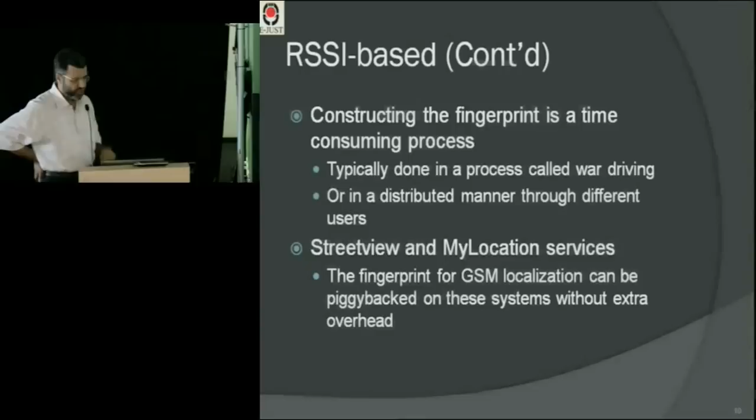So in order, for example, to get the pictures of the streets in the Google Map application, while you are doing this, you can piggyback your radio map construction in the same process. So it is not something that you have to do particularly for localization. You can do it for other applications too. So the war driving overhead is very minimal here too.

So currently, to my knowledge, there are 2 main techniques for using RSSI localization in GSM networks. One is deterministic fingerprinting, and by this what I mean is that the red dots represent locations where you have the fingerprint. So at each of these locations, you stand and collect the signal strength characteristics. And here I assume you have only one cell tower, and the characteristic that is stored in the radio map in deterministic techniques is the average signal strength from this cell tower.

So you stand at this location, you collect a number of samples, and you store in your radio map the average signal strength you hear from this cell tower. The yellow dot represents an unknown location. You are currently standing at this yellow dot, and you want to know which of the red dots you are standing at currently.

So in order to do that, what deterministic fingerprinting techniques do is they calculate the Euclidean distance between the signal strength at the unknown location and the signal strength stored in the radio map. And they return the closest location in the radio map in terms of signal strength as the estimated location. So in this example, the closest location is -32 to -28, and it's returned as your estimated location.

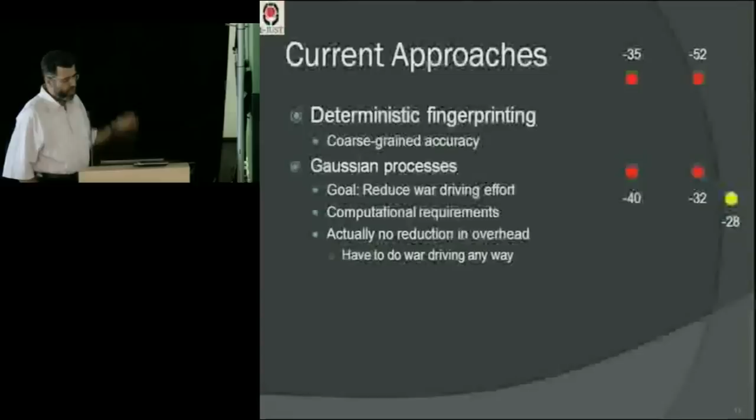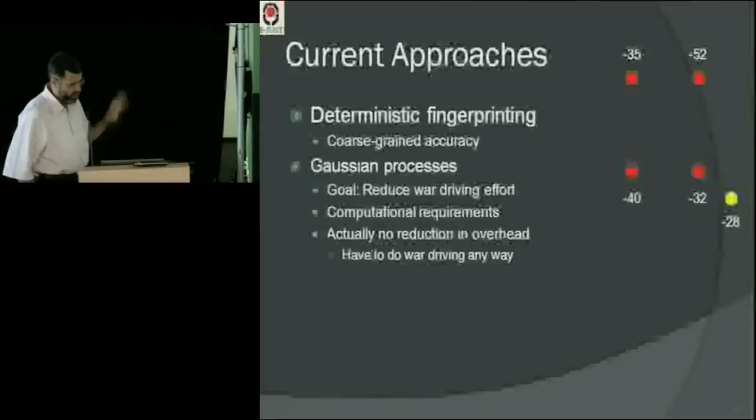We believe that deterministic fingerprinting techniques provide coarse-grained accuracy, and that's why we propose probabilistic techniques that can help enhance the accuracy of localization, as I will talk in the next part of my talk. There have been also proposals using probabilistic techniques before.

What is called Gaussian processes, and the idea here, their goal was to reduce the fingerprint construction overhead. So instead of collecting 1,000 samples, for example, you collect only 100, and then you try to interpolate these 100 samples to obtain more samples. So you are reducing the number of points you need to collect, and in order to do that, they assume a Gaussian process model and a propagation model to obtain the remaining of the samples.

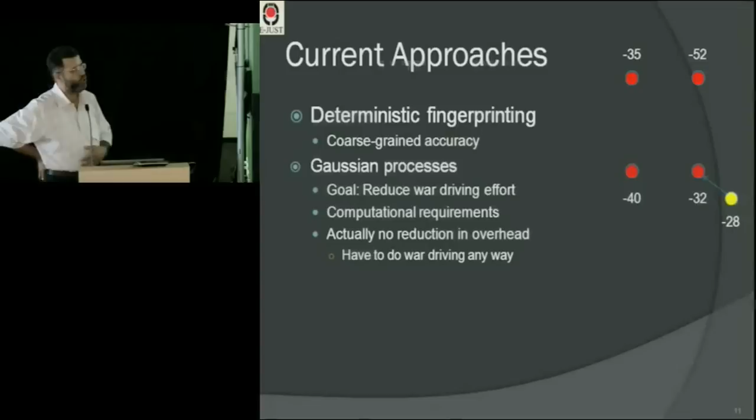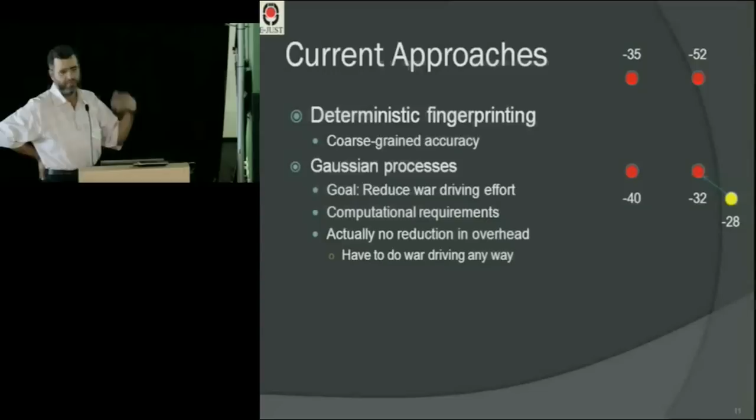You can imagine in order to do these interpolations, your computational overhead will be very high, and actually, I believe that there is no actual reduction in terms of the overhead. Why? Because in order to collect 100 samples, you will need to do the war driving anyway. So if you do the war driving, it doesn't matter if you collect 100 samples or 1,000 samples because you already drove the streets. So it doesn't save much in terms of fingerprint size.

So our approach is to use probabilistic fingerprinting, and hopefully we can obtain more accurate localization. And instead of storing in the radio maps, the red dots, the average signal strength, we need to store the entire signal strength histogram. So this gives you more information about the signal strength behavior, and using this extra information, you can obtain more accurate localization.

However, the challenge here, in order to obtain a signal strength histogram, you need to stand at each location for a certain amount of time so that you can collect enough samples to construct your histogram. So by this, you are complicating the radio map construction process, because instead of driving continuously by your car, you will have to stop at each location. So this will increase your time significantly. So what we propose in CellSense is how can we reduce this overhead in terms of constructing the radio map.

So I'll talk about the two phases, which is the offline phase, constructing the radio map, and then the tracking phase, estimating the location once you have your radio map in place. So in order to solve the overhead of the construction of the radio map, we use a gridding approach. So your area of interest is divided into a grid where each cell represents a virtual location.

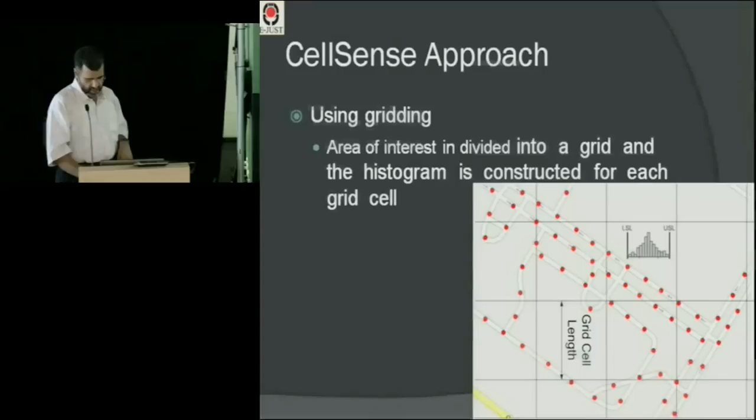Of course, we have a parameter here, which is the grid cell length, how large your grid size should be, and by this parameter, we can control the accuracy of the system and trade it off with the scalability of the system. Because the larger your cell size, the less your number of grid cells, and hence the better your scalability, but your accuracy will decrease. And we'll quantify this later in the evaluation section. So this is the offline phase. What we do is we divide the area into grid cells and construct a histogram for each cell.

During the tracking phase, you are standing at unknown location L, and you are receiving a signal strength vector of Q dimension, where Q is the number of cell towers you can hear. In the GSM standards, you can hear up to 7 cell towers. So each component represents the signal strength from one sample from a cell tower. And what we want to find is the location L in the radio maps that maximizes the probability of this L given the received signal strength vector S.

Using Bayesian inversion, the location that maximizes the probability of L given S is the same location that maximizes the probability of S given L. And I remind you, the probability of S given L is what we stored in the radio map. So this information on the right-hand side can be obtained from the constructed radio map. Assuming the cell towers are independent, you can obtain this by multiplying the individual components.

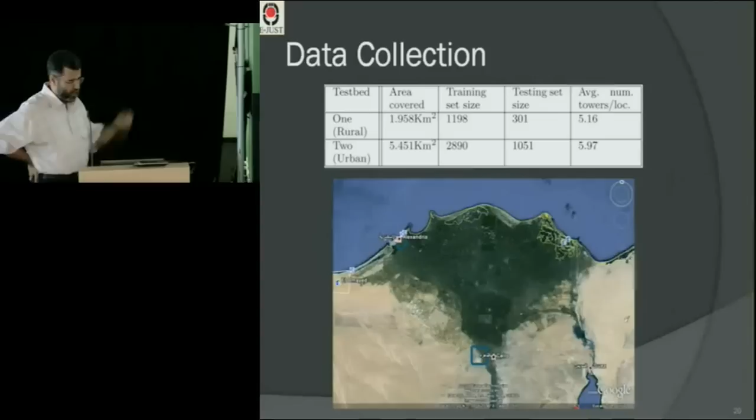So how well did we perform? In order to test our system, we experimented with 2 different test beds: one in the Smart Village in Cairo, a typical rural area, and another in Alexandria, a typical urban area. We have 2 data sets, one for testing and an independent one for training, for the 2 different test beds. In the rural area, the density of cell towers is less than in the urban area.

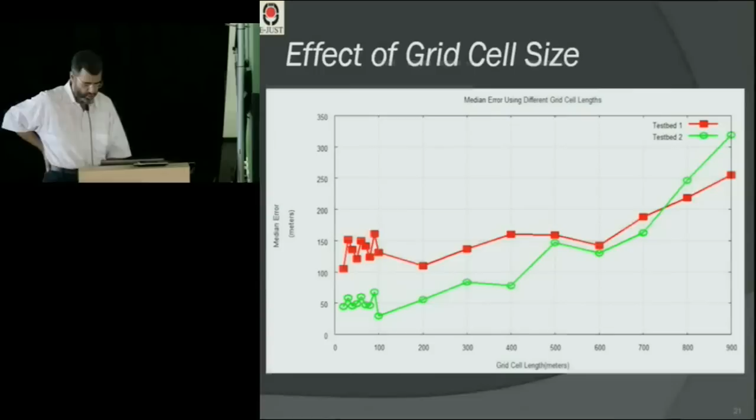This figure shows the median error as we change the grid cell size. As expected, as you increase the grid cell size, your localization accuracy decreases since the size of the grid increases. However, if you look at 100 meter grid size, the accuracy is comparable to very low grid sizes. So this is good news: you can have relatively large cell sizes but still obtain good accuracy.

In terms of the number of samples you use concurrently to estimate your location, as we increase the number of samples used in location estimates, the accuracy trend improves. But at the same time, you need to wait for more samples in order to get these n samples, so your latency will increase. So you'll have a trade-off between latency and accuracy of location estimation.

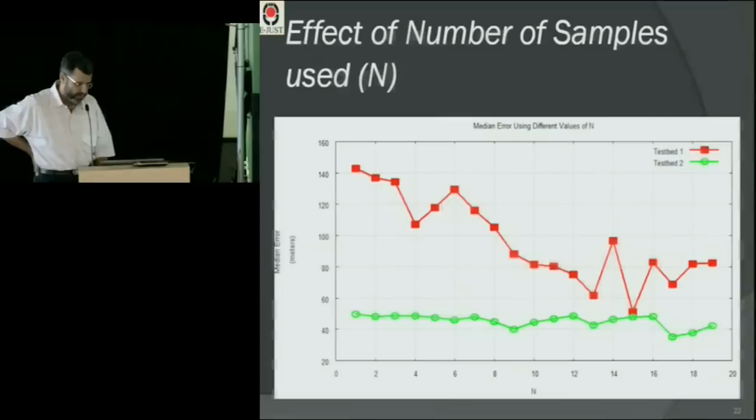This is the last parameter: how many locations you average as a post-processing step. So instead of returning the most probable location, you return the average of the k most probable locations. Again, as you increase the value of k, your median error decreases and your accuracy is enhanced.

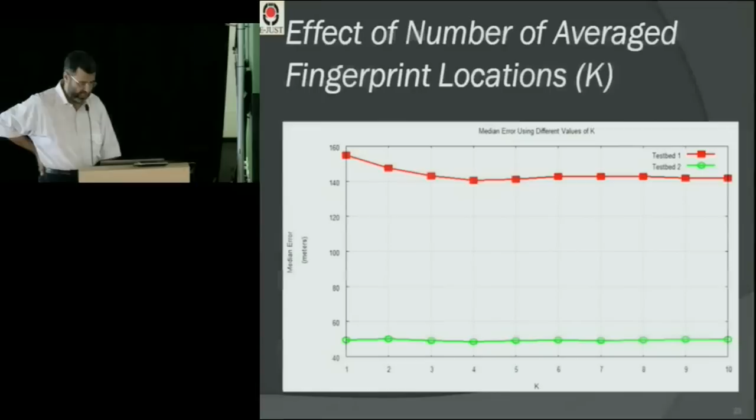Comparing our technique to other techniques: we compare CellSense, the red curve, with deterministic fingerprinting, the blue curve, Gaussian processes, the green curve, and Google My Location, the purple curve. For Google, we send the query with the cell tower using the Google API to the servers and obtain the location estimates. The other 2 techniques we implemented ourselves, as we implemented our system.

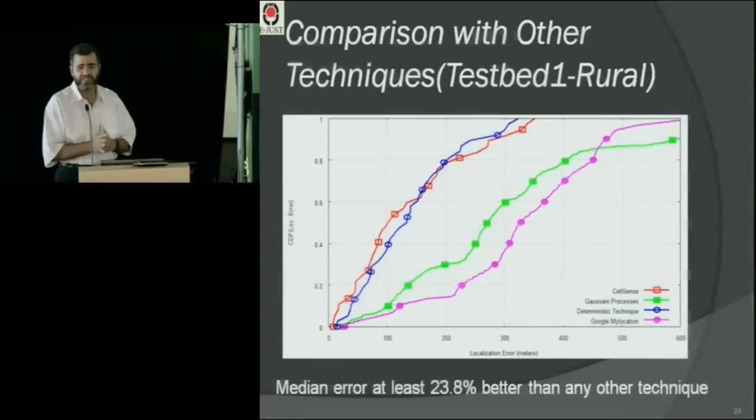We can see from the figures, this is the CDF of distance error, which gives you the probability that your location will be less than a certain error. You can see the median error at 0.5 for our technique is better than the other techniques by at least 23.8%. This was in the rural areas.

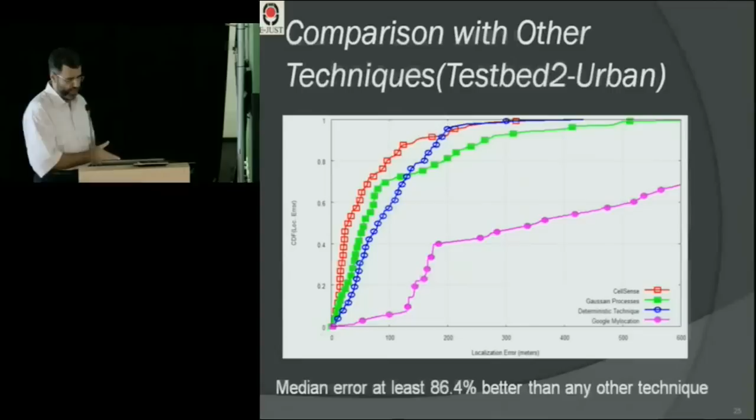For the urban areas, we have even better accuracy. We can achieve at least 86.4% better than any of the other techniques. This table summarizes the results in numbers. I'm not sure if it's clear.

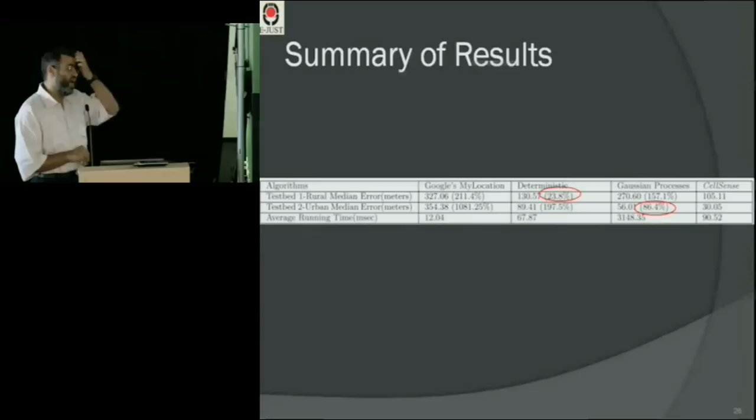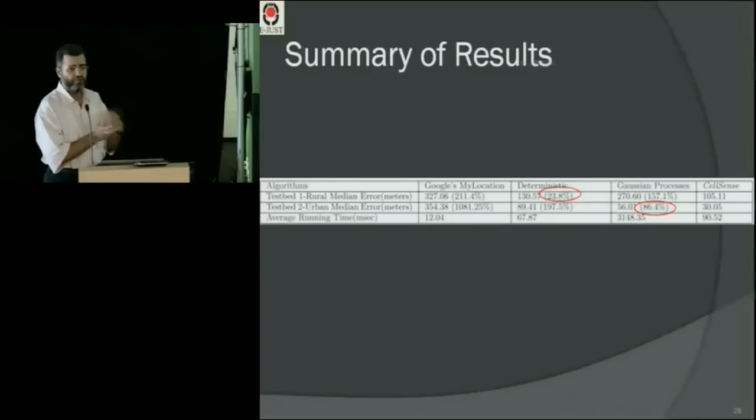In terms of running time, we are slightly slower than the deterministic fingerprinting techniques. The deterministic fingerprinting techniques take about 68 milliseconds per location estimate, and our technique takes about 90 milliseconds per location estimate. Google My Location, since it's cell ID based, doesn't do a lot of processing, so it takes about 12 milliseconds to obtain a location estimate. So as we said, there's a trade-off between time and accuracy.

In conclusion, CellSense is a probabilistic fingerprint-based GSM localization technique that uses gridding to reduce the fingerprint construction overhead and to scale the system. Its accuracy is better than any of the current techniques for GSM localization, by at least 23.8% in rural areas and 86.4% in urban areas.

I now switch gears to another localization system we developed within the context of this project, which is JAC, a hybrid GPS, accelerometer, compass localization scheme. This technique doesn't use GSM for localization, but instead uses the accelerometer and compass available in smartphones to do localization combined with GPS.

The motivation for this work is that many of today's smartphones contain an accelerometer and a compass, mainly used for screen auto-rotation. If you rotate your phone, this rotation is detected by the accelerometer, so the accelerometer is continuously running. It's used for gaming control and for many other applications, like flip to silent, where you flip your phone to silence it.

Whenever people talk about localization techniques, they usually focus on the accuracy of the technique and ignore the dimension of energy consumption. However, if you think about it, some applications don't need very high accuracy. For example, if I just need to know I'm in Mountain View, I'd be happy with 1 kilometer accuracy, not meter accuracy. So can I leverage this coarse-grained accuracy to reduce the energy consumption of my localization technique?

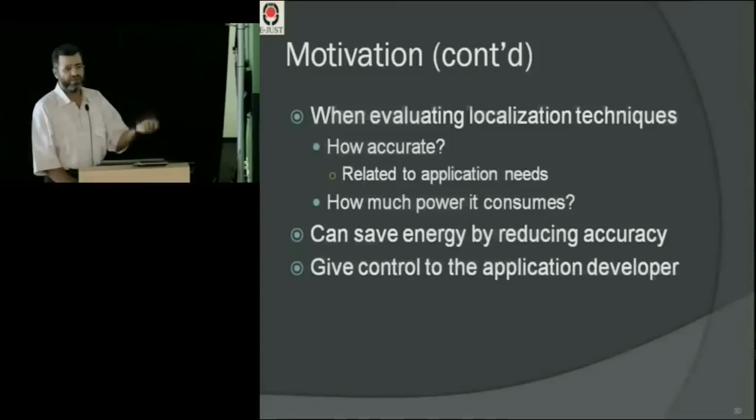This is what we are trying to target here. We are trying to study this trade-off and give control to the application developer so that he can choose whether he needs accurate localization or energy-efficient localization.

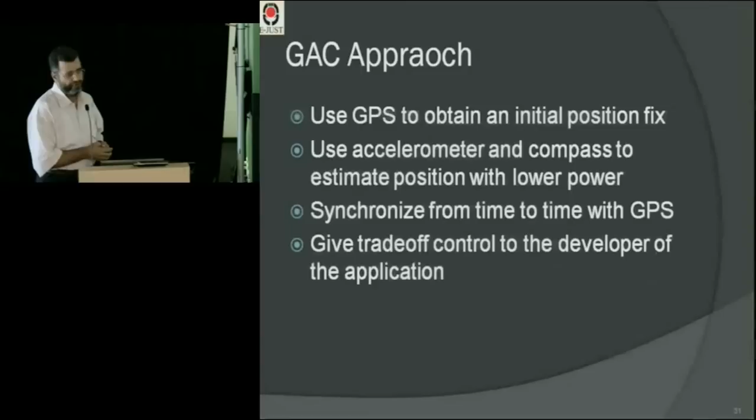The approach, simply the overall idea, is that it obtains an initial position estimate using GPS, and then turns off the GPS and switches to the accelerometer and compass to estimate the location. From time to time, it synchronizes back with the GPS because of the accumulation of error. So instead of using the GPS continuously, you are duty cycling it with a very, very low duty cycle to enhance your energy consumption.

So in this part of the talk, I'll start by talking about the Android power profiling for the different location components in the Android phone. Then I talk about our proposed hybrid technique, and finally I'll touch on the power-aware location power management layer in the location platform. And finally, I will conclude.

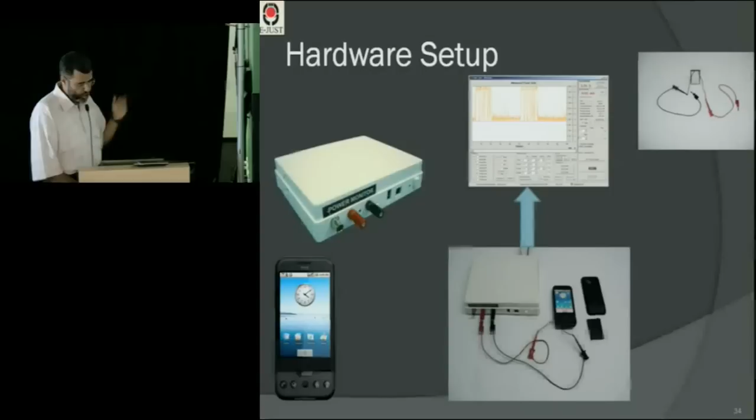In order to profile the power consumption of the different location components, we did it on an Android Dream G1 phone, using a monsoon power monitoring device. The way it works is that you replace the battery of your cell phone with a battery that comes with the device, connect it to the device, and have an application running on your computer that tells you the current drained from the battery, so you can know which component is using which amount of current. Since voltage is constant, you can use current as an indication of power consumption.

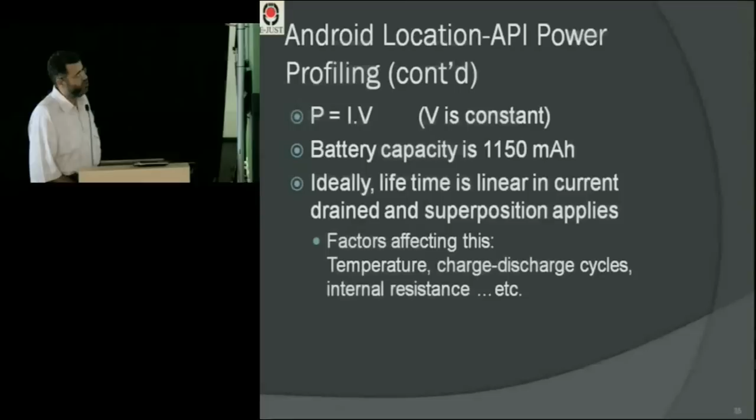For the accelerometer and the compass, the chip on the HTC Dream phone combines the accelerometer and compass on the same chip. This means that if you are querying the compass or the accelerometer, both of them are running and you are consuming almost the same amount of power. You have a 3D accelerometer from this chip, and the Android API provides 4 different data rates for querying the Android accelerometer.

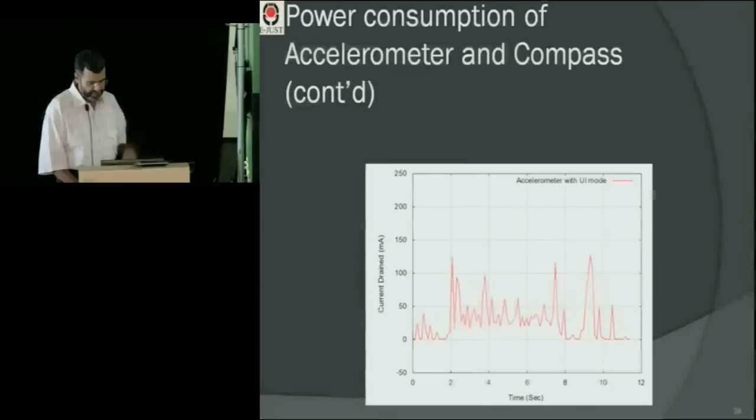This is a typical curve you can get when the accelerometer is running in the user interface mode. You can see it consumes about 40 or 45 average current during its operation. We'll quantify this more in numbers later.

These are the 4 different modes of operation. You have the normal data mode where you can have 4 samples per second, up to the fastest mode where you can have up to 50 samples per second. The power consumption is not linear in the number of samples you collect. Our hypothesis is that you have 2 modes of operation, slow and fast, and that's why it is not linear. However, we didn't have access to the data sheet of the accelerometer and compass chip to confirm our hypothesis.

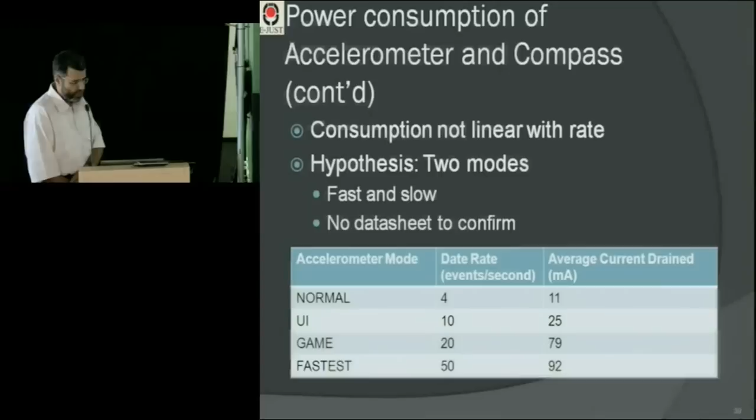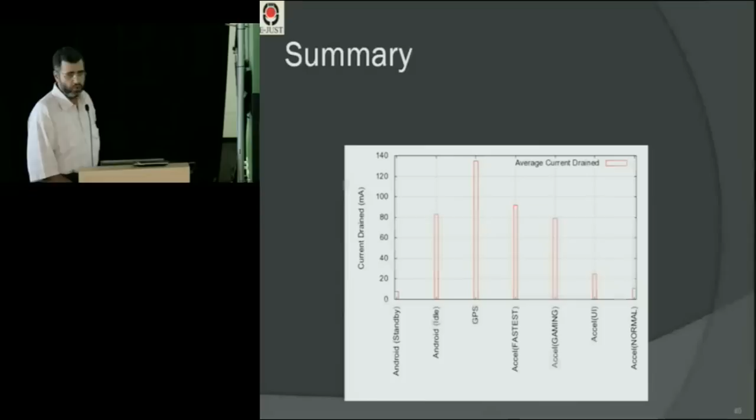Comparing the different techniques, the GPS consumes about 140 milliampere when it's running, compared to the normal mode of operation of the accelerometer, which is more than an order of magnitude less power consumption. This gives you an idea that if you run the GPS, it consumes 11.73% of the battery in 1 hour, meaning your battery would run for 8 or 9 hours. If you use the accelerometer in normal mode, your battery would run for 100 hours. So it's significant saving in energy if you can turn off the GPS and depend on the accelerometer for your location estimates.

As another advantage, the accelerometer is already running all the time in the background so that the operating system can detect the auto orientation of the phone when you change it. So if you base your estimate on the accelerometer in normal mode, you are not consuming any more energy than standard phone operation. You're getting it for zero extra energy consumption. So we'll talk about how we leverage this in our estimation.

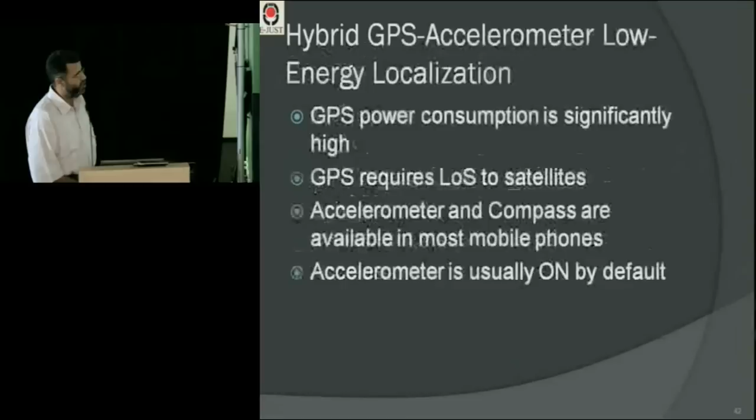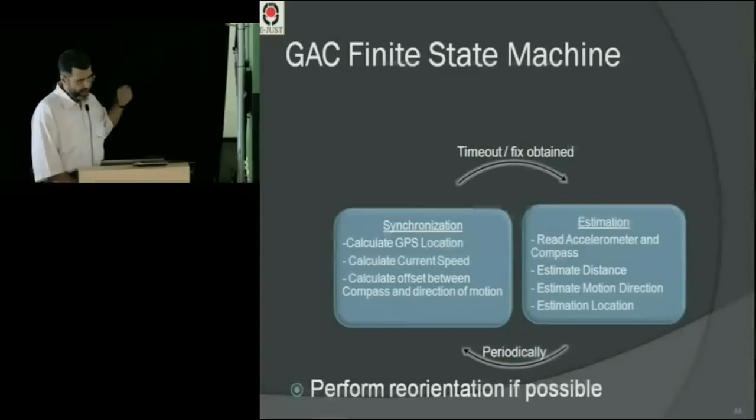and this repeats forever until your localization is done.

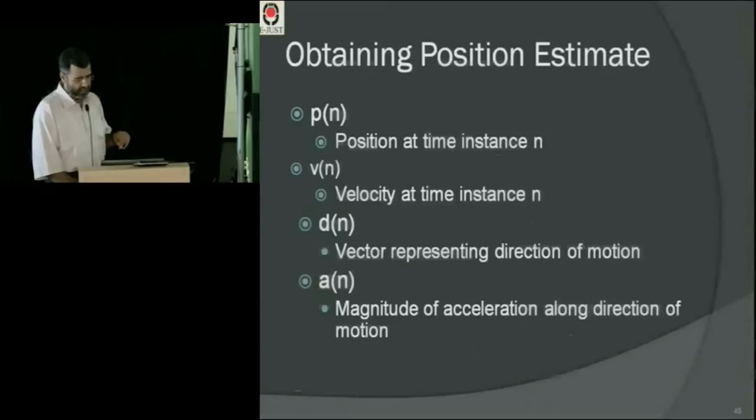In order to obtain the position estimate, we use the standard Newton laws to obtain the position estimates for the accelerometer and the compass. I will not go into the details. The only thing I need to highlight here is that we need to take the curvature of Earth into account.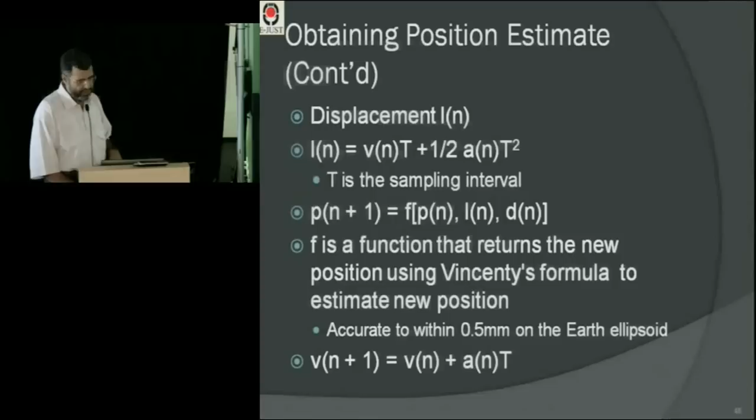Since the Earth is like a sphere, you cannot use Euclidean distance in order to calculate your location. Instead, we use Vincenty's formula, which is accurate to 0.5 millimeters on the Earth's ellipsoid, in order to obtain the location estimates.

Okay, in order to evaluate our system, we had two different test beds, one on highways and the other inside the cities. We studied the effect of changing the synchronization period on accuracy, and we compare our system with EnLoc. EnLoc is similar to our system with the exception that it doesn't use the accelerometer or compass.

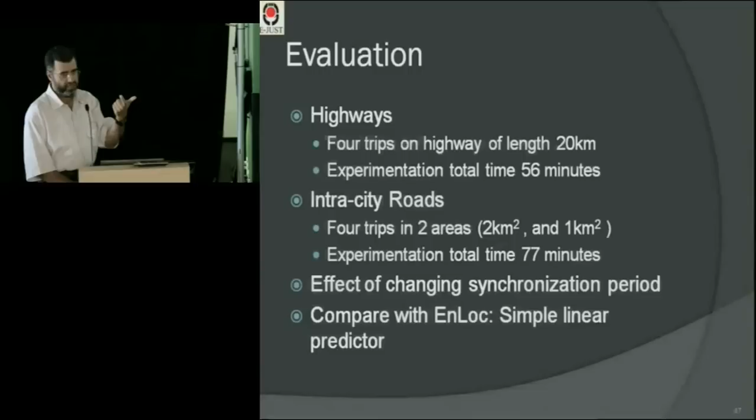The way EnLoc works is that it obtains a GPS fix, estimates the current speed and the direction, and assumes that this speed and direction will be fixed until the next synchronization point. It doesn't use the accelerometer and compass in between. So we compare our system with this very simple technique using linear prediction.

In order to evaluate our system, we had a debugging tool based on Google Maps where we draw the GPS traces and the estimated traces, and I can show you an actual demo from it.

So what we are seeing here is the debugging tool. It gives you information like the total trip distance on top, then the trip duration, your average speed, your error at the final point of the trace, your root mean square error, and your maximum error.

And you can control the synchronization frequency in seconds. Currently it's set, as you can see here, to 10 seconds. This means that every 10 seconds you turn on your GPS to synchronize with it, and you can change it up to 2 minutes to see the effects.

And down here you can see the trace. This is a highway in Alexandria city. The green ticks represent the GPS trace, which is taken as the ground truth.

These yellow and red ticks represent our estimated location. The yellow dots represent the synchronization period, the period you turn on the GPS, and after the yellow dots finish, your GPS is completely turned off, and you are only using the accelerometer and the compass for estimating the location. It's 10 seconds, that's why it's short.

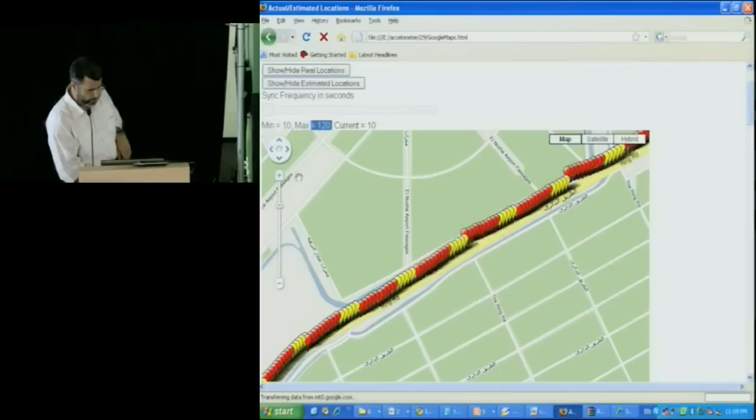We'll change it now to see the effect. You can see, for example, if I am synchronizing every 10 seconds, my estimate is very accurate to some extent. My root mean square error is 6 meters.

If I increase it, for example, to synchronize every minute instead of every 10 seconds, you can see the error accumulation here.

So again, you turn the GPS on for the same period, and the red period is where the GPS is completely turned off. You have a lower duty cycle, so your energy consumption is much less, but at the same time, you are not synchronizing with the GPS more frequently, so you have more accumulation of error.

I remind you, we are not using any heuristics on top of the localization system. So I am not using the street map to match the estimated location, I could snap it to the street, but I'm not doing this here. We can, of course, enhance this, but we are not doing it here. Of course, you can click on any point, and it gives you more information.

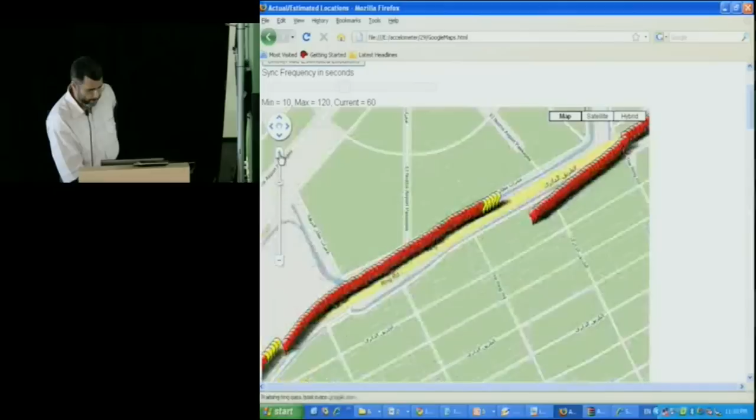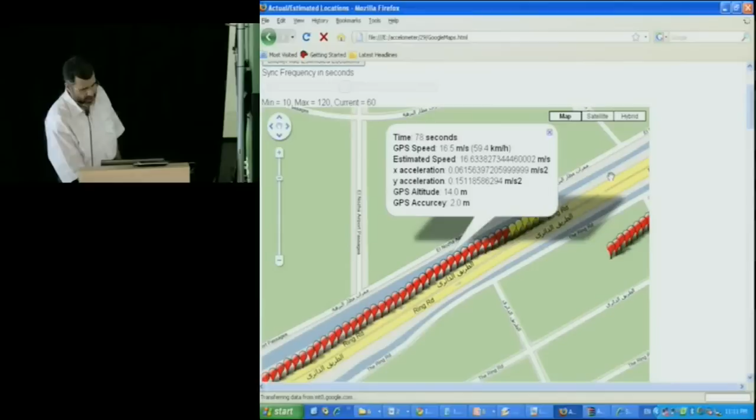If you click on the point, it tells you when it was collected from the start of the trace, GPS speed, estimated speed. You can see that the GPS speed was 16.5, and our estimated speed from the accelerometer was 16.6, very close. It gives you the X and Y acceleration, gives you the GPS altitude and the accuracy of the GPS. We have other figures too.

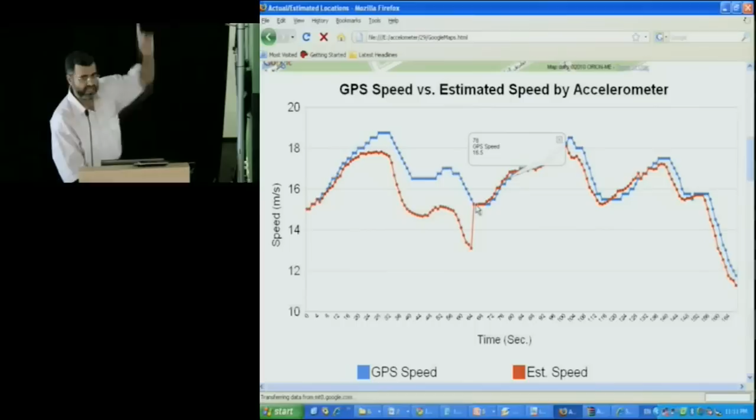This is the same point I clicked on in a different figure. The blue curve gives you the estimated GPS speed, and the red curve gives you the estimated speed using the accelerometer and the compass, or dead reckoning in general. And you can see there is a drift in the middle, and that's the cause of the drift from the actual position. And at this point, there was a synchronization with the GPS. That's why the accuracy was snapped again to the estimated location.

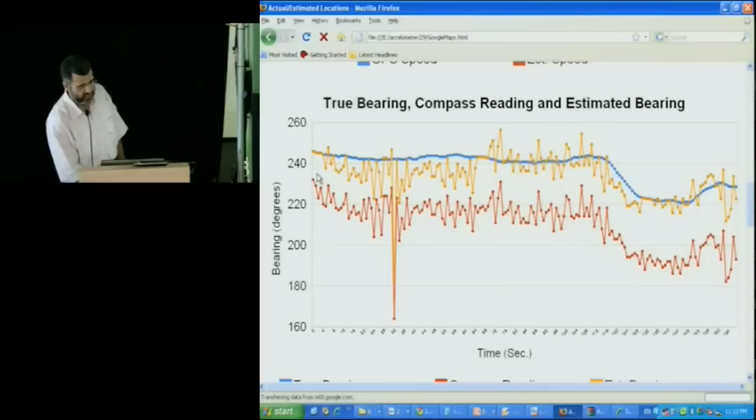This is for the accelerometer. For the compass, the blue curve is the direction estimated from the GPS. The red curve is the direction estimated from the compass. And you can see there is an offset between the two. In order to correct for this offset, during the synchronization period, we calculate this offset, and then we remove it from the estimated direction. So during this period, we estimate this offset, and we subtract the offset from this curve, which gives you the orange curve on top of the blue curve.

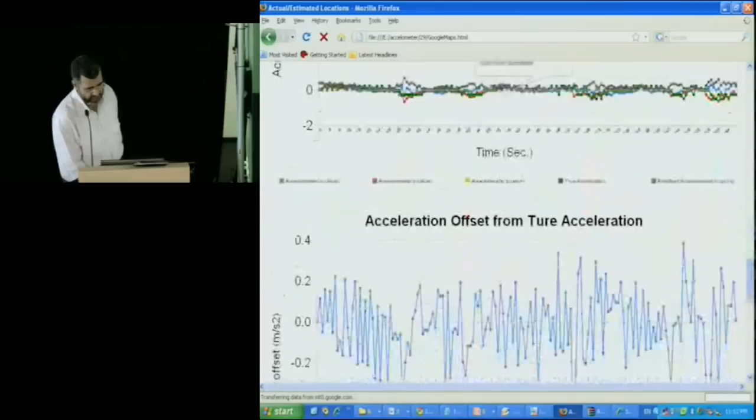We have other figures like the accelerometer reading and the difference between the true acceleration and the estimated acceleration. You can see it's within plus or minus 0.2 meters per second squared. Let's go back and see numbers. This is the debugging tool where it gives us the numbers, accuracy, and so on.

In terms of power consumption, what we see here is a comparison between the different techniques for different synchronization periods on the x-axis in seconds, and the y-axis gives us the milliampere hour consumption of different techniques. You can see that GPS, if you leave it on all the time, consumes, as we said, about 140 milliampere per hour. Comparing our technique to EnLoc, EnLoc is slightly better than our technique in terms of energy, and the reason for that, as we said, is that EnLoc doesn't use the accelerometer and the compass, and our technique uses the accelerometer. So the difference between the blue curve and the green curve is the power consumption of the accelerometer and the compass.

However, as I mentioned, since the accelerometer is running all the time in the background to detect the change in the orientation of the phone, we are not using any extra power on top of the standard operation. If you take this into account and remove it, we find that our technique consumes the same amount of energy as the EnLoc technique. So we are consuming the same amount of energy, and you can see that the saving in power consumption is exponential compared to the GPS. As you increase your synchronization time, your power consumption decreases exponentially. So this is a significant saving.

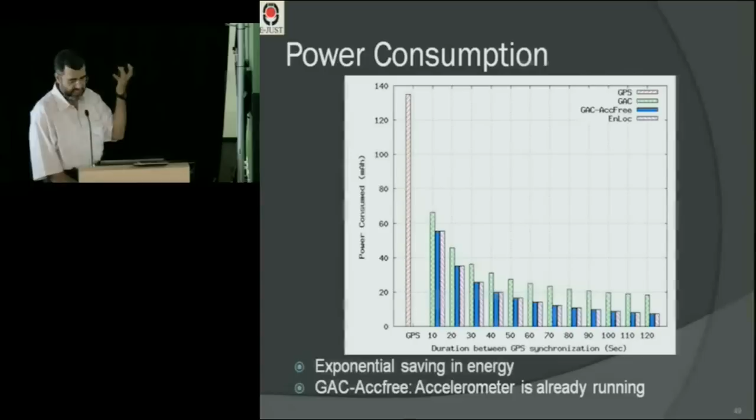In terms of accuracy, this shows the accuracy for highways. Let's focus first on the green and the blue curves. The green curve is our technique's root mean square error, and the blue curve is the EnLoc linear predictor root mean square error. You can see that for short synchronization periods up to 50 seconds, there is no difference between the two techniques. However, as you increase your synchronization period beyond that, EnLoc actually gives better accuracy than our technique. The reason is that on highways you are usually moving in a straight line, so the assumption of EnLoc is accurate. We are using the accelerometer and the compass, but we are not synchronizing frequently enough, so we have accumulation of error that decreases our accuracy.

So as I said, for small synchronization periods we have the same accuracy, but if you want to move to higher synchronization periods, EnLoc will be better for you if you are using the highway.

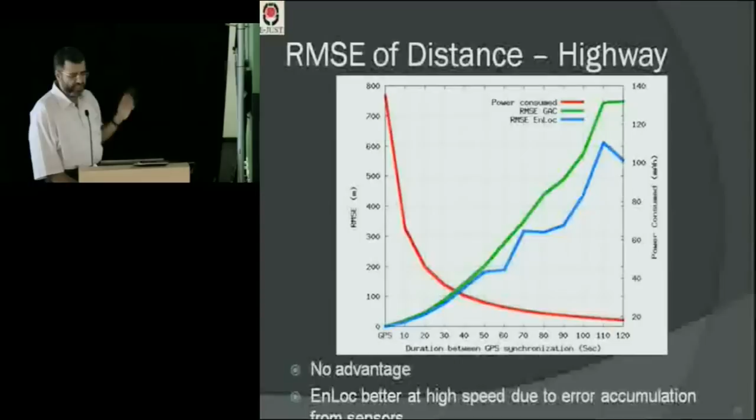So I'll touch briefly on the power-aware management layer in the location platform. Currently, in order to obtain your location estimate, what you have to do is construct a location listener, register it with the location provider, and you specify whether you need to use GPS or network-based provider. And when you are done, you unregister your listener, and that's it. However, the developer doesn't have control over the accuracy or energy he is requiring. All he can say is that I need my location update, for example, every 10 seconds or whatever. He cannot say that I need my accuracy to within 1 kilometer or 10 meters or whatever.

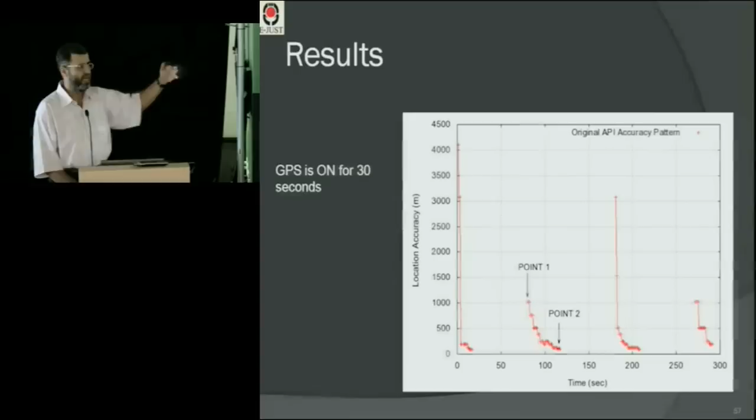So in summary, what we provided in the second part of my talk is power profiling for the GPS and accelerometer and the compass on the HTC Dream Android-powered mobile phones. We showed that GPS consumes an order of magnitude more energy than the accelerometer and the compass, and we proposed a hybrid GPS accelerometer compass-based scheme that uses the GPS very infrequently in order to do synchronization, and then depends on the accelerometer and the compass to reduce the energy consumption. We showed that our technique can give exponential saving in energy with a linear loss in accuracy, which is very promising.

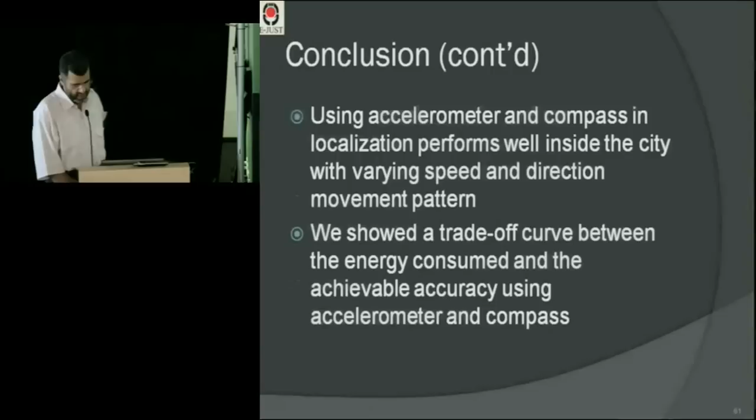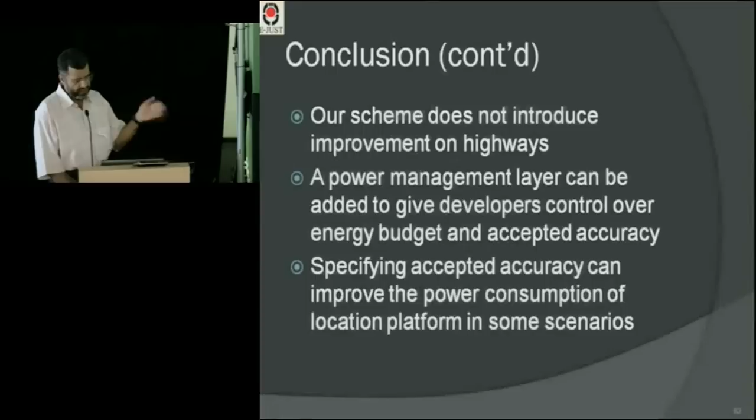And our scheme doesn't lead to significant improvement over EnLoc in highways when you are having a long synchronization period. However, it has significant improvement inside cities where you have a large number of turns and accelerations and decelerations. Currently, we are working on performing complete power profiling for the Android platform of the different components so that you are taking the operating system overhead into account also in the power management layer. And we are also thinking of integrating the power profiling results into the Android emulator so that when developers are working on the emulator of the Android phones, they can have a sense of how long the battery will last when using this component or this technique on your phone.

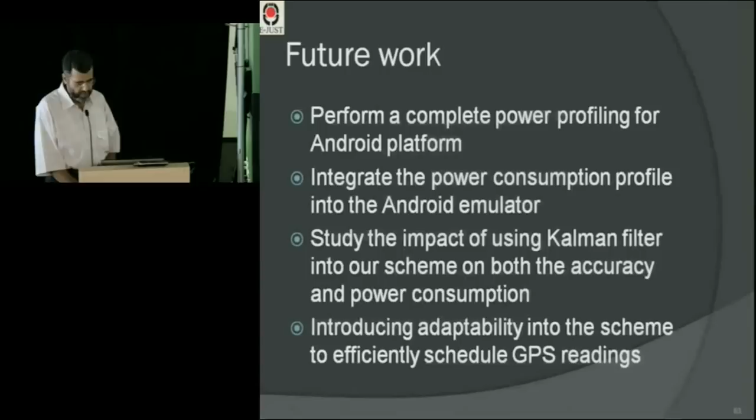We are also experimenting with using Kalman filters and other statistical techniques to further enhance the accuracy, and also experimenting with dynamically adapting the synchronization period. And instead of having a fixed synchronization period, how can we adaptively change it based on the accuracy so that we can further enhance the energy consumption.

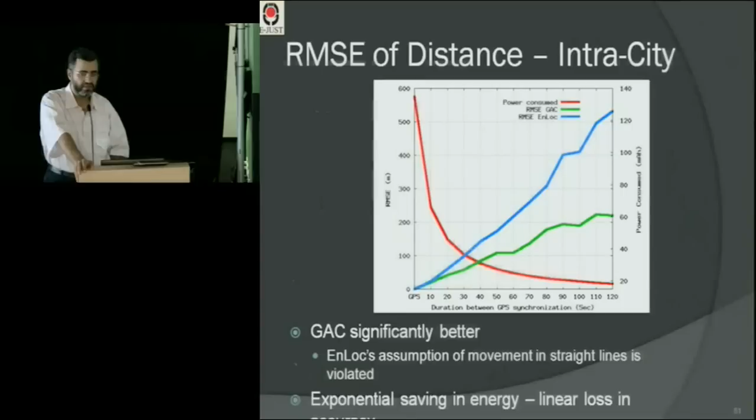Okay. And do you have a similar graph for the city driving? For what? Intra-city driving? Yeah, the error graph for that. This one? No, the Google Maps thing where it showed the error. Oh, I don't think I have the data set. All of them are highway. I think all the data set I have here is for the highways.

Sorry for that. Does the estimation do a good job when you make a sharp turn? Actually, the turn we take more from the compass. So when you make a turn, the compass will give you a better estimate of the direction. We just take the accelerometer to estimate the displacement, how much you moved along this direction. That's why we combine both.

Actually, in the slides, this is from intra-city driving, but I don't have the data with me. So this is within city, but it's static. I cannot change the parameters. Okay.

Inside what? Inside a car. Because the car itself has a very strong magnetic field. So the question is, if you use the compass inside the car, there is a magnetic field that may affect the accuracy of the compass.